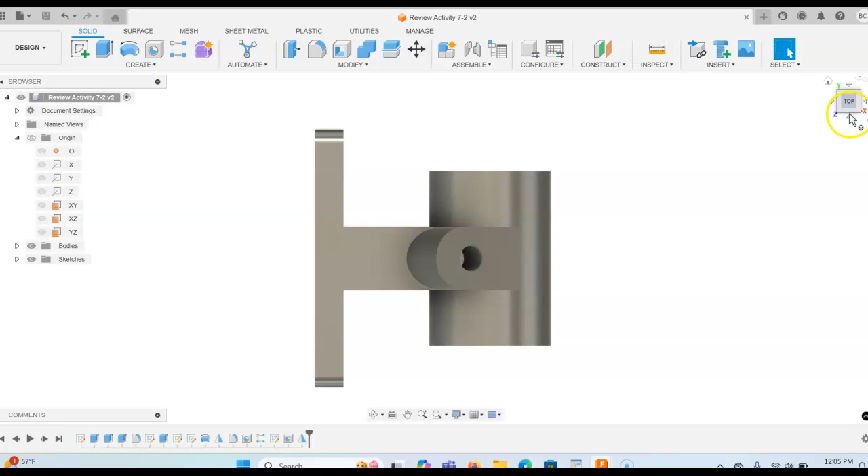So let's go ahead and go back. There's the front view again, and let's rotate around to what we would see in the right side view. Now, here you can plainly see the right side view. Notice we do have the inclined surface here. So we have our spotfaces on the back there for the bolts to hold this on, and of course we know that this is a rounded surface based on what we've seen in the side view or in the front view as well.

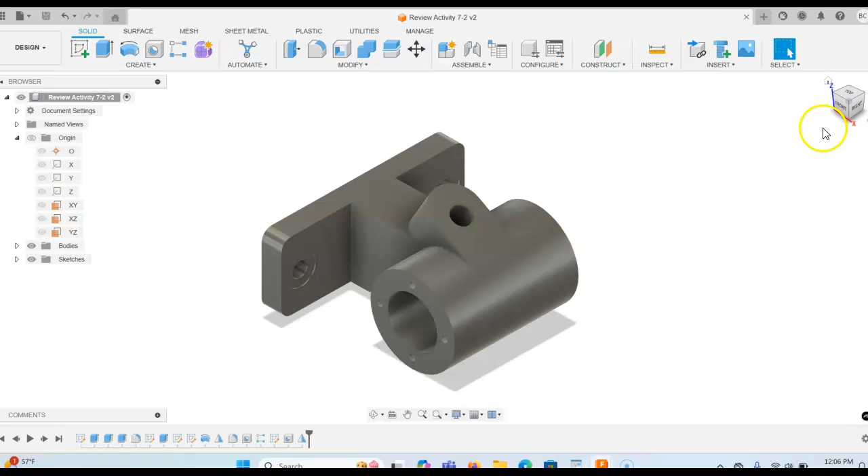So let's kind of come back over here now. As we take a look, this would be the isometric view, so you can kind of see this here. And we want to have an idea of what this looks like and what the true size and true shape of this is. Let's go back to that right side view again. So notice our hole here looks like it's an ellipse in this view, even though we know that a drilled hole has to be a circle. It can't be an ellipse. So let's kind of come back over here as we move around.

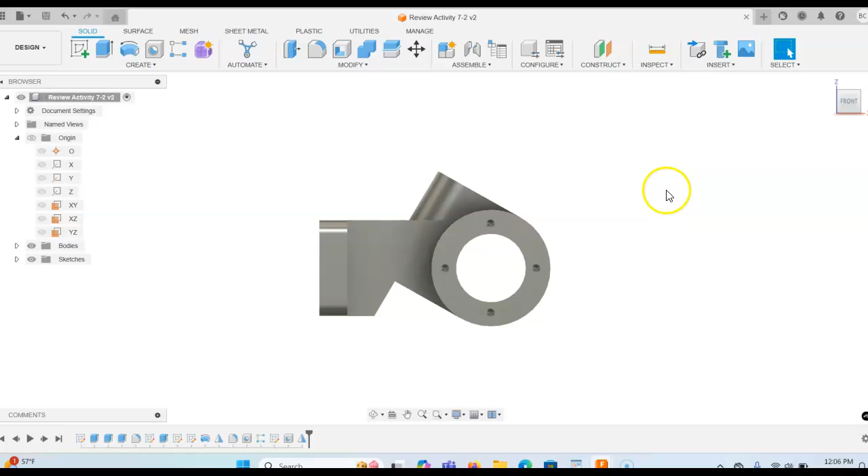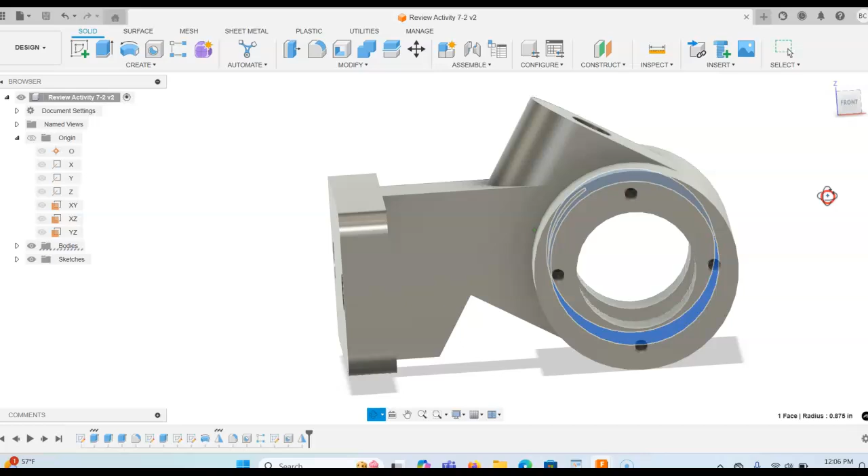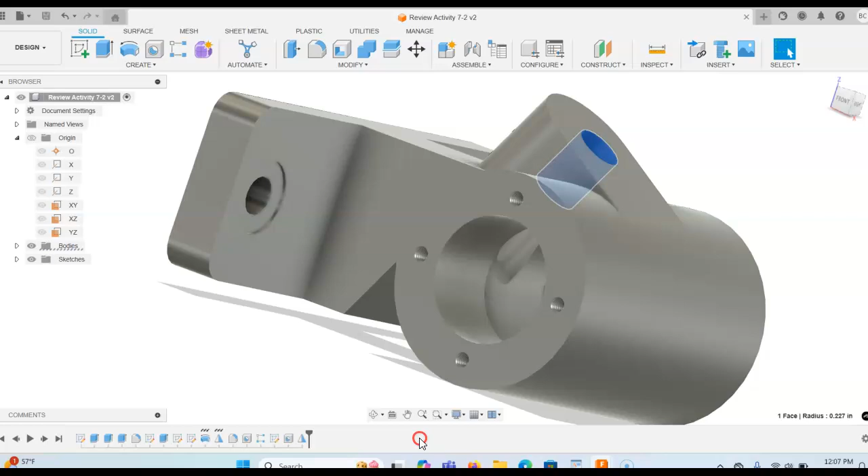Now notice we're going to kind of manipulate through here. We can also tell because of the inside shape. So we've got some inside bores of this part that are bigger than their outside surfaces. So we've got some pockets or some hollowed out cavities on the inside of this here. So in this dimension we're seeing that's larger. So if we kind of go back in and come up here, we'll see that. So we got the parts that are representing the hole here as well. So let's take a look through here as we manipulate this around just so we can kind of see.

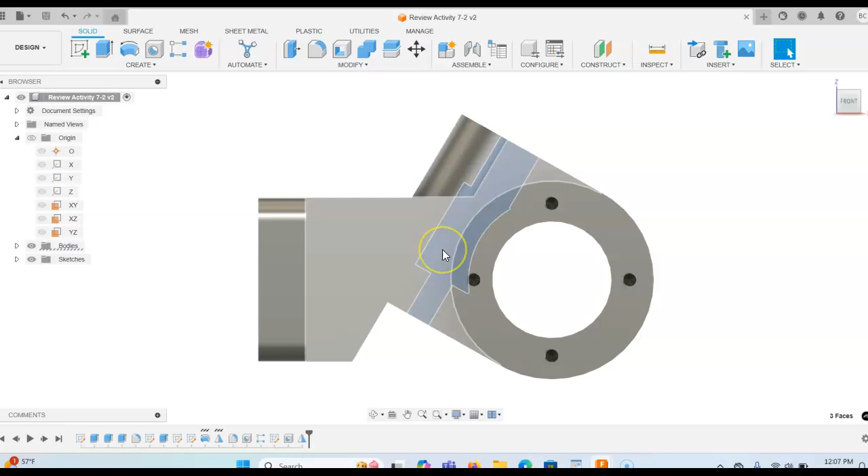Now notice there from the front view that is indeed an open area as well. Now we can't see that because of the part, but that's where the cutout in the section view looks. Now I'm going to change a few things up here with the appearance in CAD just so you can kind of see it. So we'll change this from shaded to what we call shaded with hidden edges. So now you can kind of see the hidden lines that are behind each of these as well.

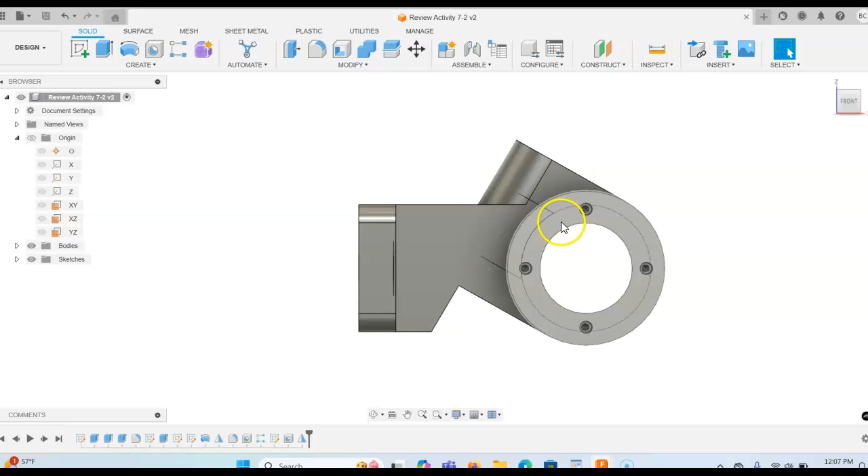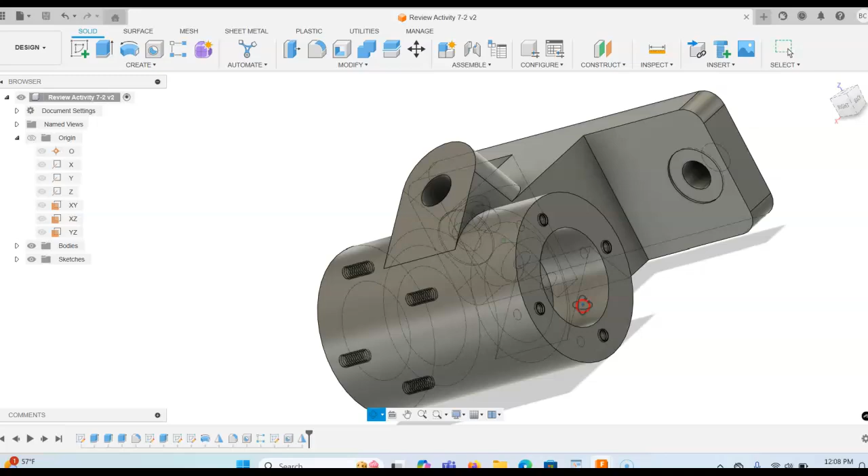And let's manipulate this a little bit more so that you can see all these hidden lines that indicate the internal surfaces of this part. So see how they show and represent themselves here as we go through. So we have to have a better understanding here between the section views that we're seeing and the auxiliary views as well.

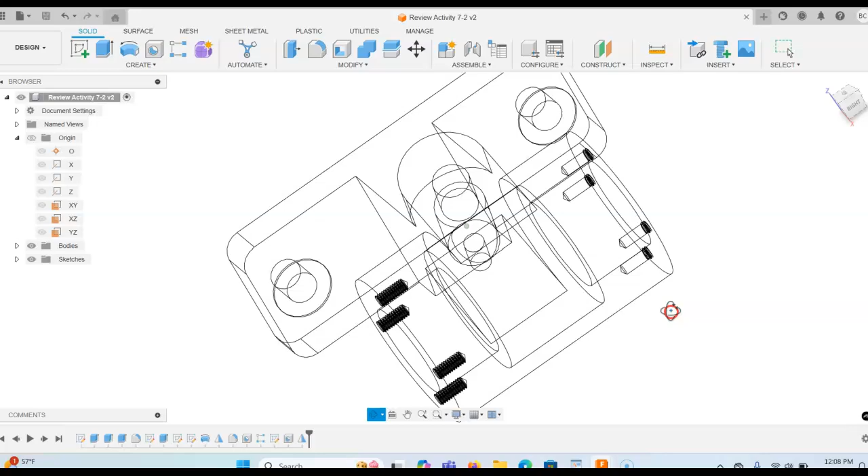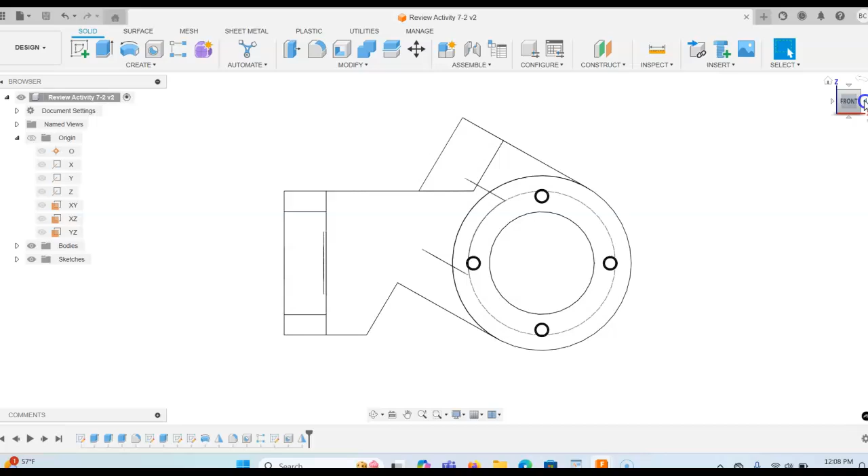Let's do one more thing here. Let's go with what we call a wireframe first. So the wireframe will show you all lines that are part of it, and you can kind of see that showing there. So we can take a look at the visible and hidden edges here. So let's go back to the front so you can see how this shows itself as we go from front to side to top view, looking at this from several different angles and several different lines of sight. So now, how does that play into what we're seeing?

So I'm going to go ahead and create a drawing of this just so you can see how this might get done. So let's go ahead and create the drawing. Now notice I'm going to make this a size C drawing for right now. And remember, a size C drawing is 17 by 22 inches. So we're following the ASME standard here. So notice if I click on standards, I can either choose the ASME standard or the ISO standard. So we're going to stick with the ASME standard right now.

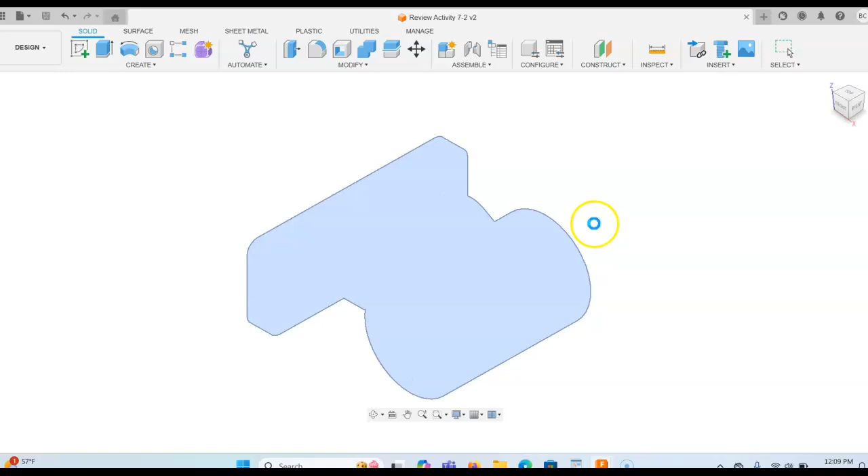Let's go ahead and click OK, so this brings it out. We're going to bring this first front view in at 1:1. Now we're going to make this 1:1 size. So there's our front view. Let me bring this over and position it there. Remember, this is a 17 by 22 drawing that we're creating here.

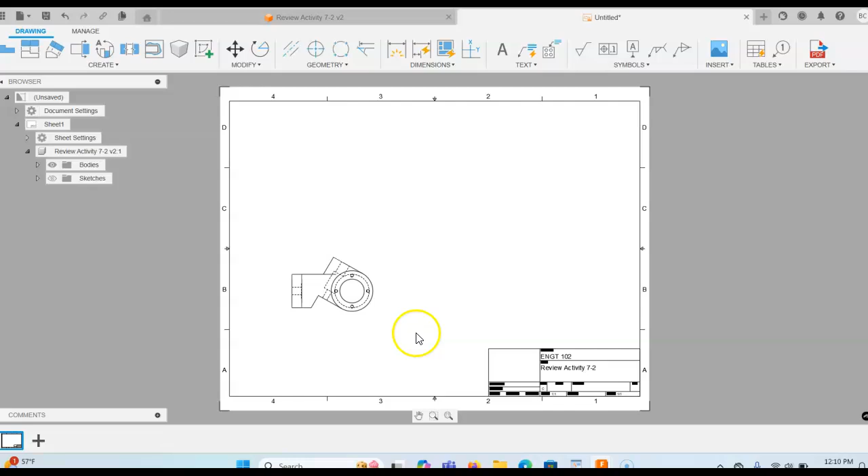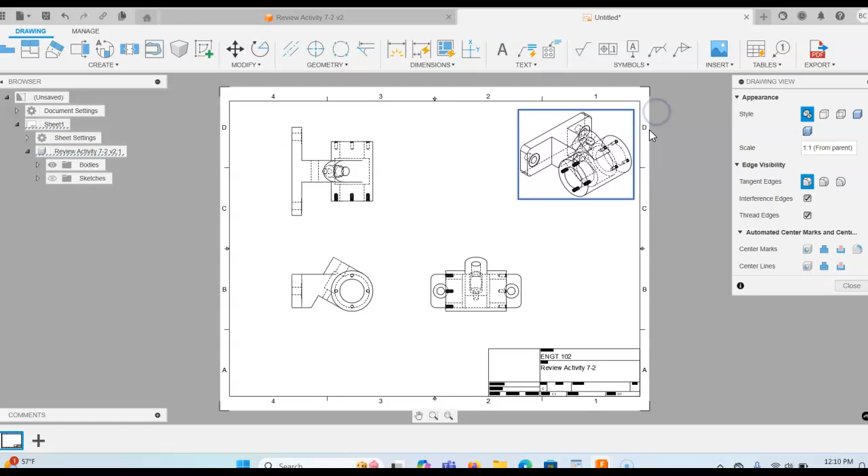So now I'm going to project up my top view. So here's my top view, here is my side view, and here is my isometric view, just so you can get a better idea. Let's go ahead and keep this particular view as shaded so that you can see the outside as the part would actually look. Now here you can see everything from the front, side, and top view.

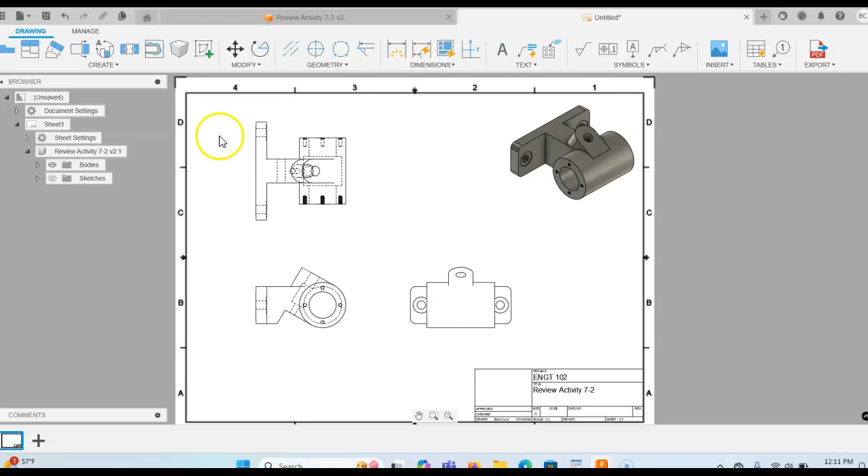Let's change this view to represent just what we're seeing. In this case, we just want it to be the object lines, so we're going to have that looking just like that. I'm going to move this back a little bit, and let's spread this out. Now remember, this is a 17 by 22 size drawing.

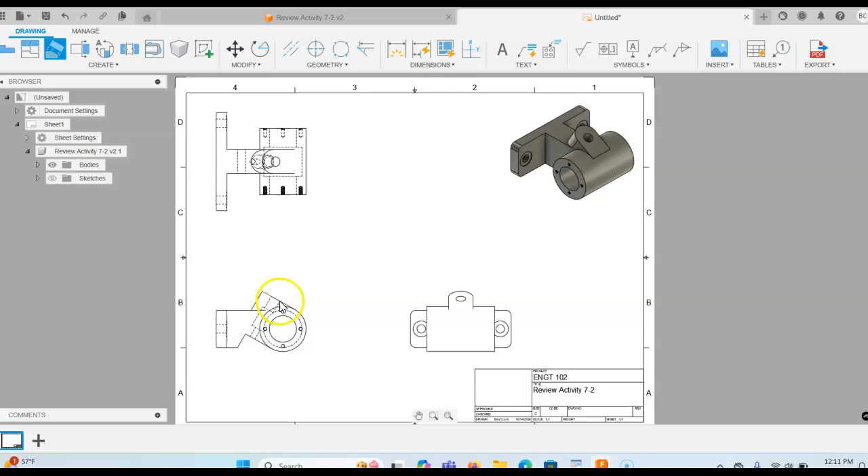So I need to come up, and we're going to use this edge to create our auxiliary view. We're going to project off of this inclined plane. Now remember, this is inclined, and that shows as an edge view over here. So let's go ahead and do an auxiliary view here. We'll select this edge, and now let's go ahead and place this.

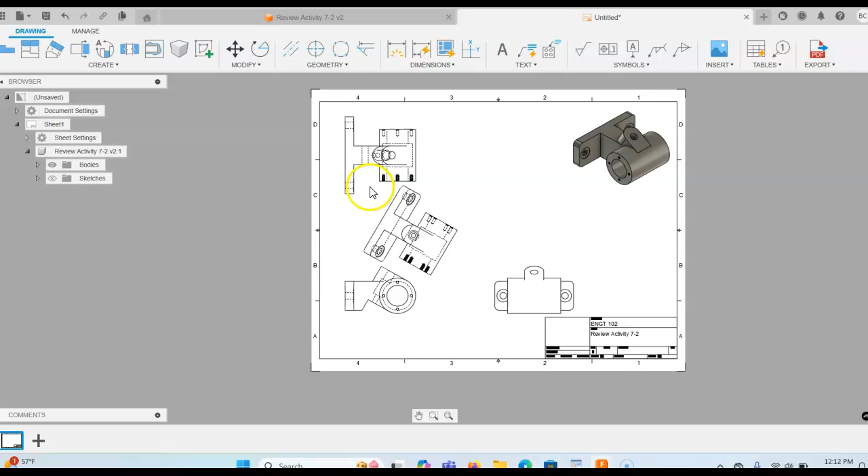Now notice, no matter where I place it, I'm very limited here so they don't run into each other. I'm going to place this right here for now and click OK. Let me see if I can move this down a little bit. Even with that, we're still running some interference. Now, at a 17 by 22 size drawing, I did have enough room to get this in here to where you could see it.

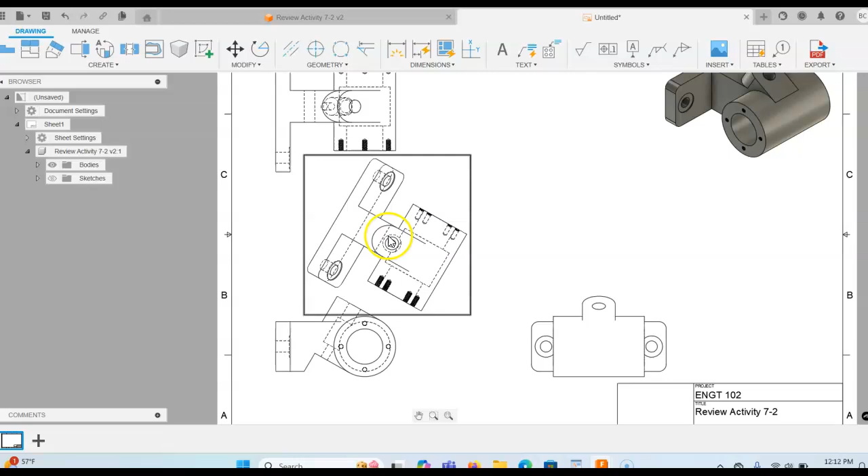And here, this is showing us our true size and true shape of that particular feature. We also have the actual hole size and dimensions that we could be putting onto that as we go through. So this is one of those areas that we're looking at, and that's a 17 by 22 size drawing.

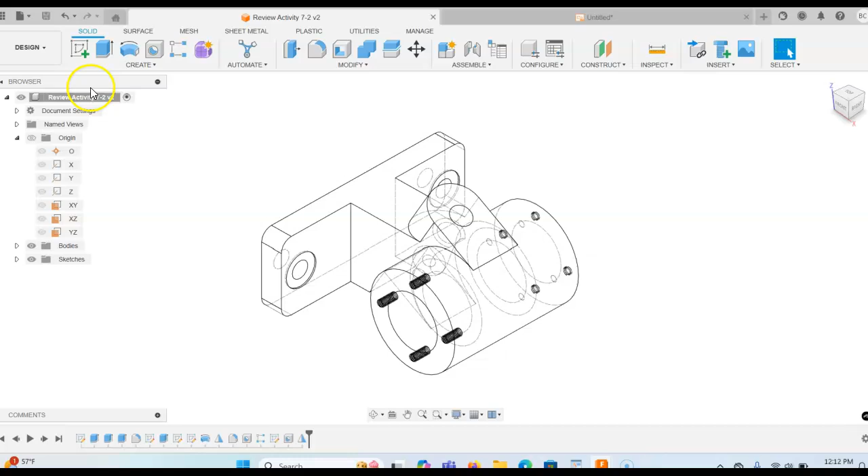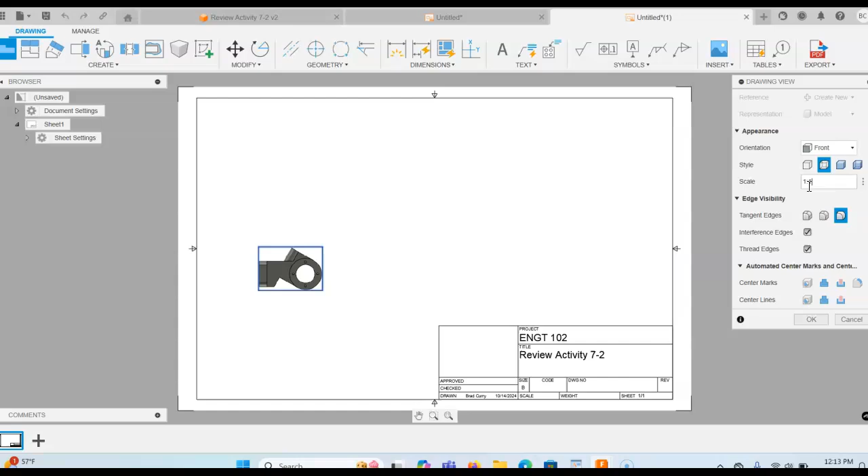Let's go back and assume that we wanted to make this drawing on a smaller size sheet, in this case a B size drawing, 11 by 17. So we could come in here and place that again. We're going to make this 1:1 scale again. Notice as it puts in, let's project up. Notice how much bigger we are with this.

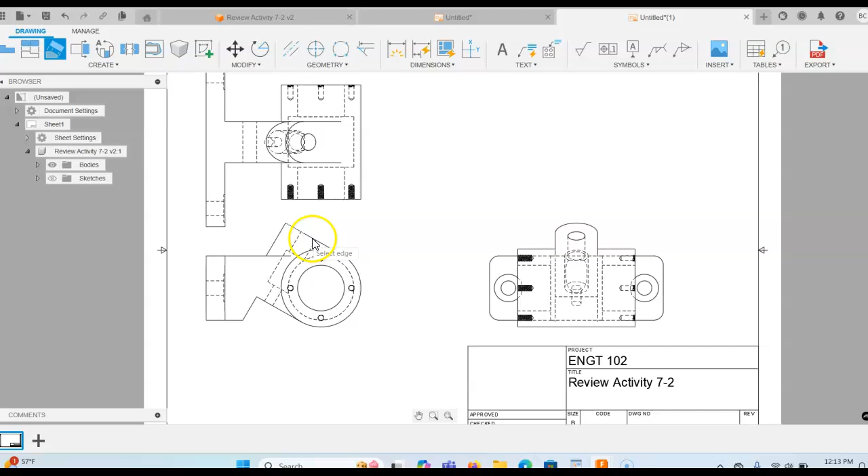I don't need my isometric on this one, so let's go ahead and clip that out. But let's go with the auxiliary view. We're going to project off of this edge. Now notice how much interference there is between these. We can't follow the rules and have enough room.

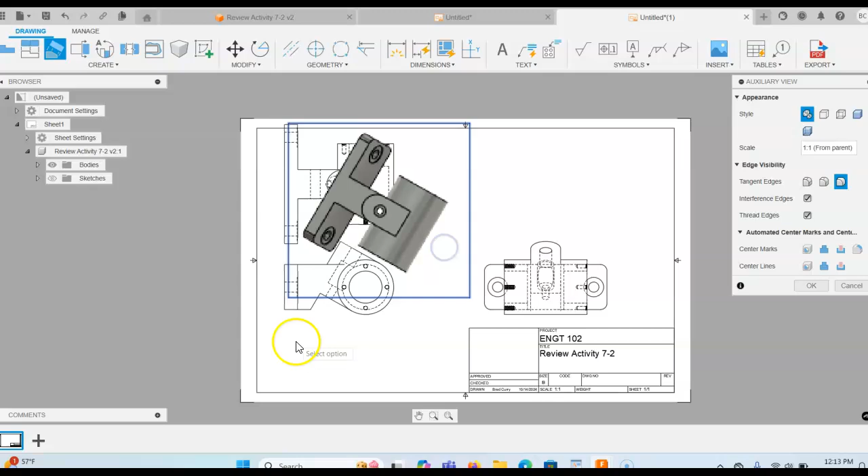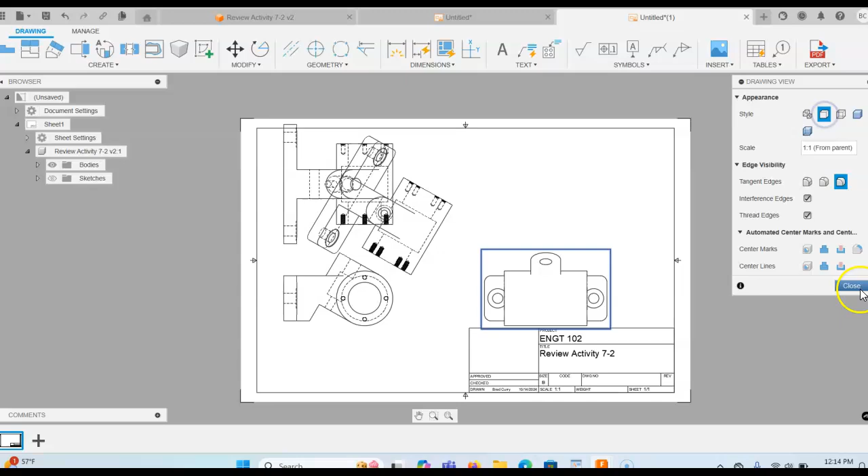Let's place this view and click OK. I'm going to move this down just a little bit. So this is one of the reasons why they have chosen to cut out this view, so that you don't have this interference between these two. That's why we say we're going to cut away part of this, and have a cutaway part of that too, to give us a truer representation as they show this.

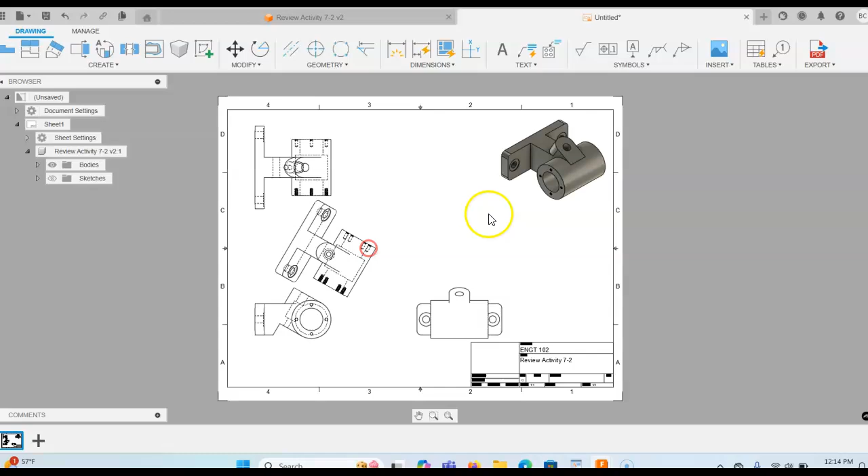So I just wanted to give you some information and use some of the solid modeling tools that we have at the college to give you some more visualization techniques to help you understand how we are defining these views, and the purpose of an auxiliary view in line with the section views that we went over last week.